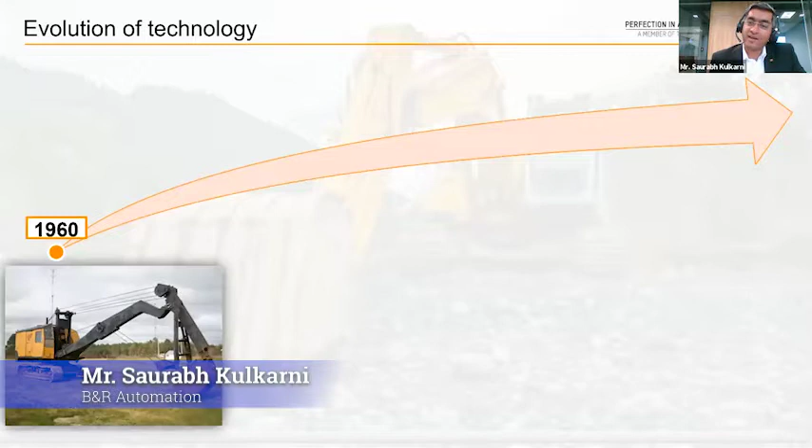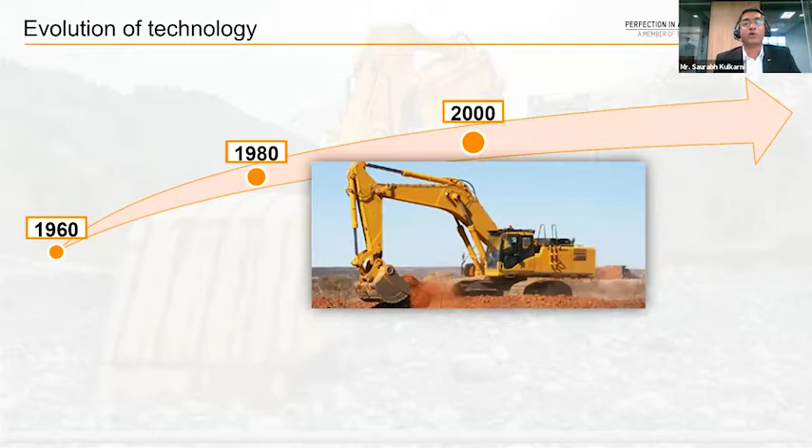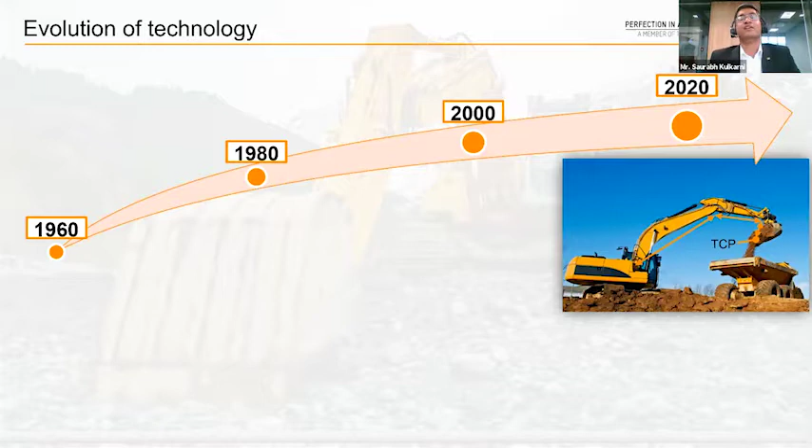From horses through steam and diesel to electric and robotic, this industry has evolved a lot. It was also evident from my previous presenter, Mr. V. Shekhar, who also explained how it has evolved. What has evolved is a lot of mechanical advancements, ease of operation, and safety for the operators. Right from mechanical or diesel things, it has now evolved more into electric and robotic. So now we can define the tool center point, so the operator doesn't need to care which lever or what needs to be operated - he can just operate one, and the hydraulic system takes care of it. We call this serial kinematics. So this industry has evolved to that point.

What has changed dramatically in this industry is the share of electrical or electronic components as compared to mechanical. Over the years this has been increasing, and we will see it increase more, because these equipments are now looked at as needing to give value for the money invested by the user - in terms of higher productivity, reliability, energy or fuel efficiency. We need maximum uptime, the maintenance should be low, and support should be quickly available and remote.

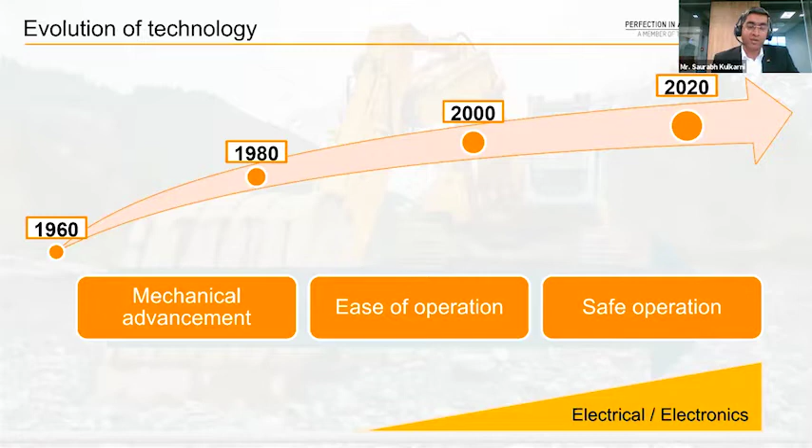As B&R, we are headquartered in Austria, and we have more than 40 years of experience in industrial automation, with customers in virtually every industry - plastic, packaging, pharma, metals, and now we are a new entrant - I would not say still new, but an entrant into mobile automation. What gives us this confidence in mobile automation is that we bring a lot of valuable know-how from other industries into this industry - our background in robotics, track systems, linear motors, and so on, which we are able to scale into this industry.

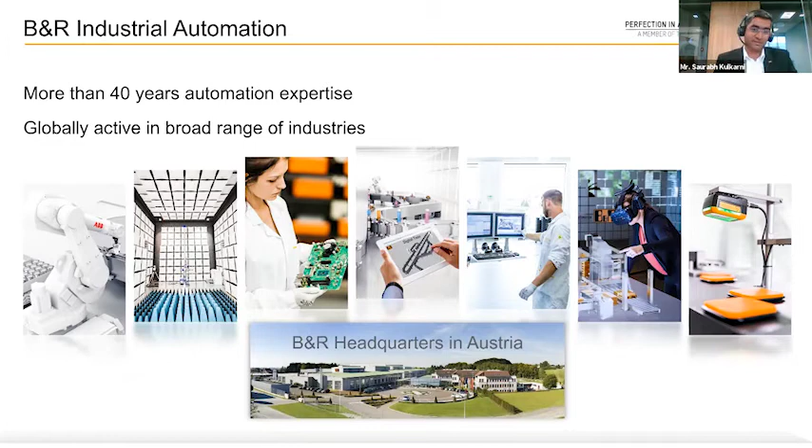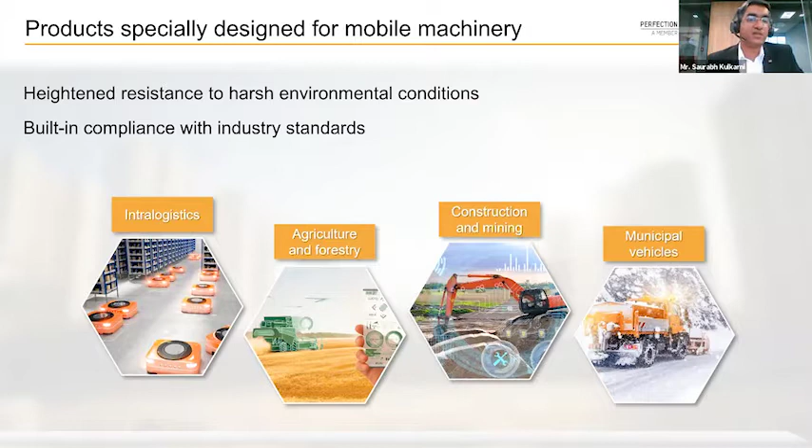We know this industry has a different set of environmental conditions, wherein machines are operated under the sun and not in an AC or closed environment, and it has a different set of standards. So we focused on this and we have brought solutions tailored to it.

So I was continuing from Mr. Shekhar's comments about the challenges faced by the industry. I've summarized these as four areas. First, digitalization - you need a strong partner, a solution provider who is clear about the vision, with a broad portfolio and strong local support. Second, complexity - day by day the machine's complexity is increasing, and we see robotics and telematics becoming a core part of it. Users are looking for integrated safety technologies and remote support. Third, shorter product life cycles, because we need to keep up with fast-moving market demands and shorter innovation cycles. Fourth, markets - to win in global markets, you need to tame the jungle of local standards and certifications.

So I will present the product portfolio we have, which we project for applications across the industry - these are specific for the mobile automation industry. We start with our X90 series, the X90 controller, which ranges from remote IOs to a controller, to a PC, and can also be customized, plus it can be extended with option boards depending on the machine or equipment configuration. There's also a touch panel with multi-touch capability that can run HTML web pages.

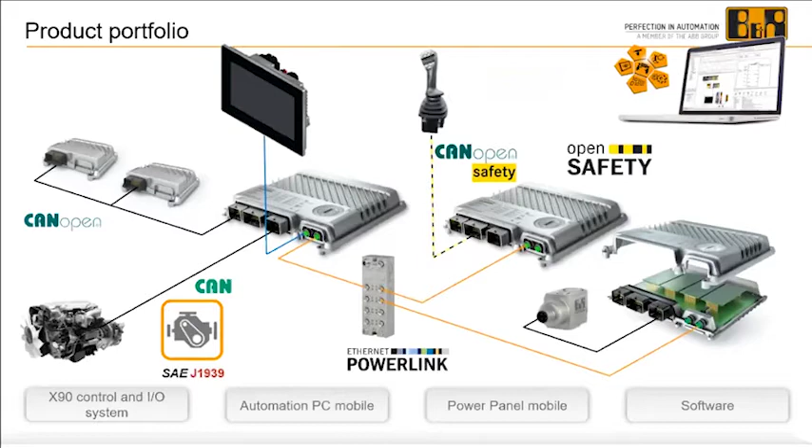Connectivity is key in achieving this feat. So even put in a nutshell, what we need here is machine-to-machine or equipment-to-equipment automation. We need cloud connectivity and safety.

In terms of industrial automation, machines in a factory still need to talk to each other. They need safety, security, real-time control, and more importantly, they should be plug and play.

With OPC UA, I would say it has a natural place in this world of mobile machinery, because even many sensor suppliers are behind it. They are aiming to achieve this protocol, and this protocol would be the next big one, because it would be the key for connectivity of your vehicle to the cloud.

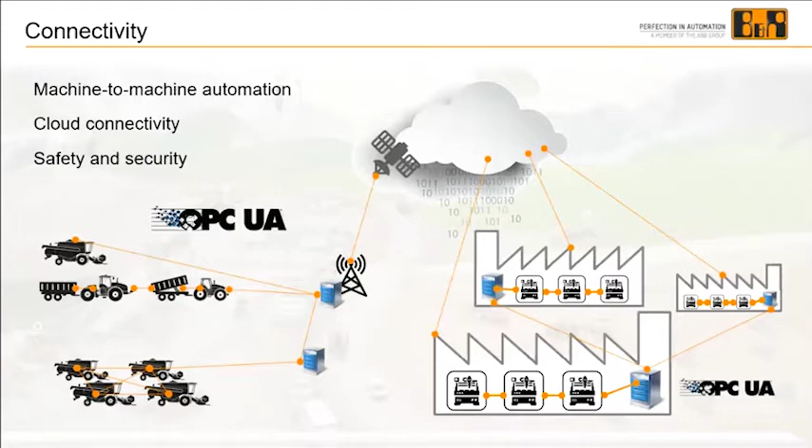So we support this — it's an onboard feature which we provide with all of our products, and there's no additional cost to it.

As a whole, what B&R offers is, I always say, a one-stop solution, majorly based on three pillars: the hardware we saw, the software which we need to program all these hardware products, and the expertise. This expertise is available globally as well as locally.

We have standard solutions — standard templates to develop such software architecture, which can be used across applications and with global standards.

Before closing out, I would also like to show our power, what we are doing in this field, be it construction equipment, forestry, agriculture, or municipal vehicles. So I will just play a video.

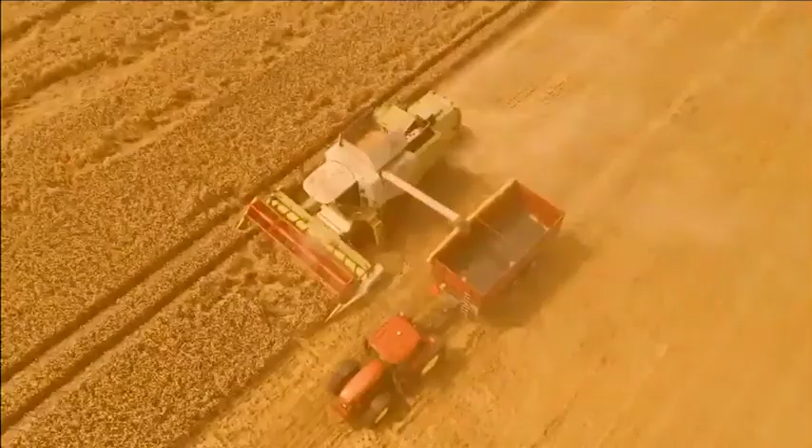Yes, it is audible. Thank you. It is working. It's working.

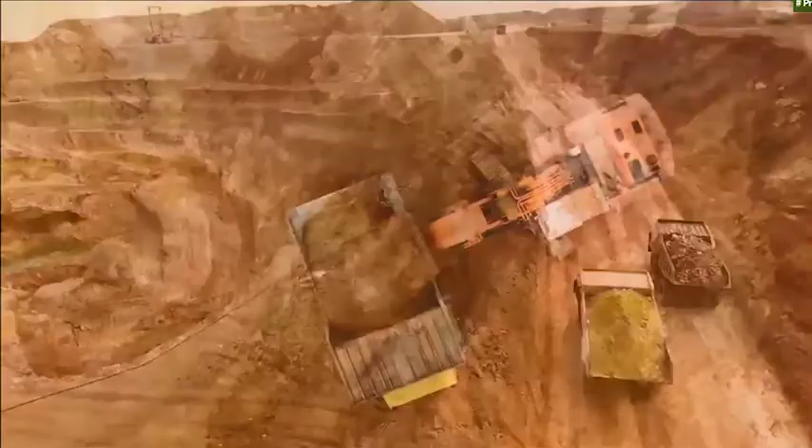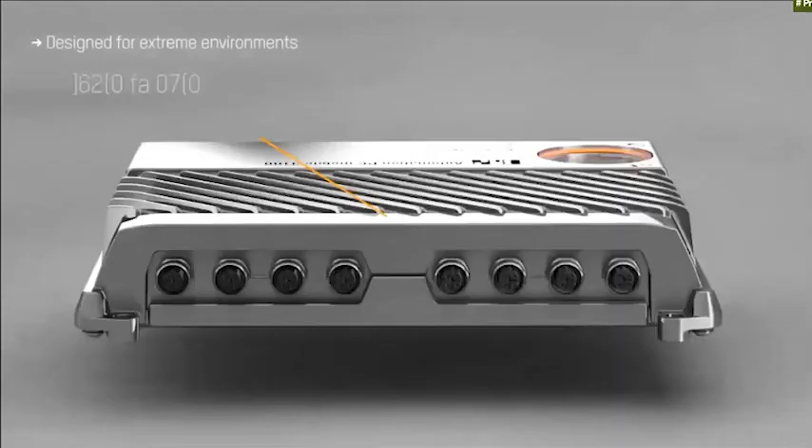Machinery in the agriculture and construction industries are evolving quickly and dramatically. To increase output, efficiency, and quality, traditional machines need to become smarter. The Automation PC Mobile from B&R is a powerful and robust PC that can withstand the harsh environmental conditions facing mobile machinery, and that forms the basis for smart solutions.

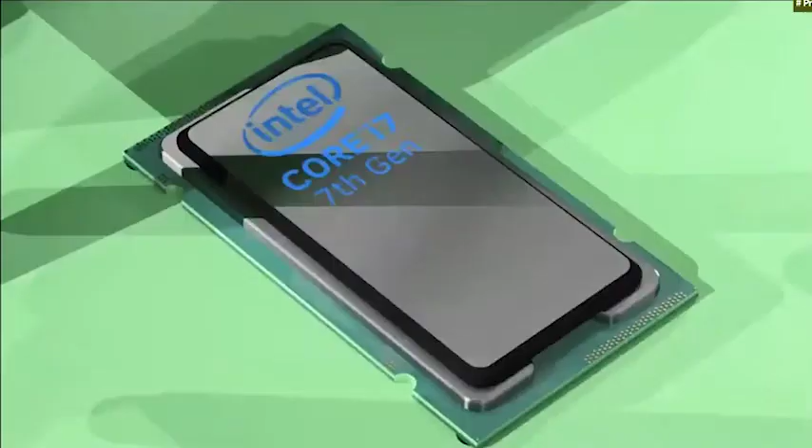B&R offers a homogeneous software platform that provides open and real-time runtime solutions, as well as tools like Automation Studio for engineering and mapp for advanced process and control algorithms. Rugged PC technology made by B&R.

To put this video in a nutshell, the demands placed on commercial vehicles have evolved dramatically over the years. With new functions being added all the time, and requirements of operating efficiency and quality higher than ever, these vehicles need an automation system that is both powerful and scalable.

With B&R's solution, we make it easier than ever to implement these automation concepts in any construction, municipal vehicle, agriculture, or forestry application. With this, I would like to thank you all.